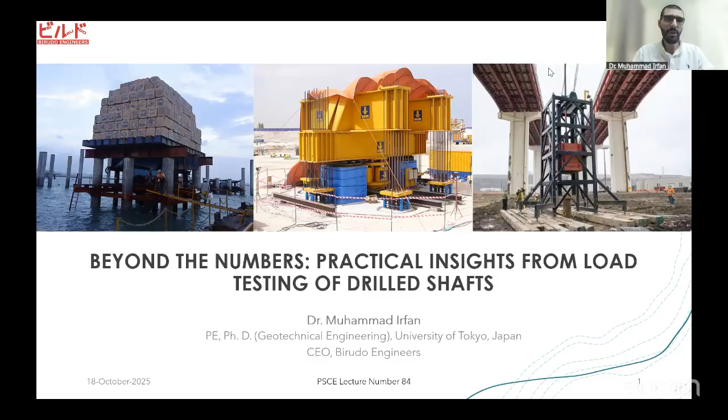I'm gonna continue on. So today's discussion topic is beyond the numbers. It's more on the practical side. There might be a lot of things that we don't find in the textbooks, and there are certain things that we often don't even discuss. So the objective of today's discussion is to look from the hands-on perspective, how the load testing of the drill shaft is to be, what are the pitfalls in that which need to be avoided, and how these can be implemented for the estimation of the pile performance in a better way.

Just to set some context, this is the third lecture in the series which I've been honored to be invited by PSCE for the third consecutive year. In 2023, when we started, we talked more on the design and construction of the pile side. Then last year, we talked more on the load and integrity testing of the pile. That was more generic in nature, where we discussed different kinds of load testing and integrity testing, and different techniques.

Based upon a lot of questions that we got from last year's lecture, I realized there is a lot of interest in the engineering community about load testing, particularly the static load testing of bored piles. That's quite common in Pakistan as well, and even if we talk about the Middle East and other industries, bored piles are mostly the common technique adopted. So that's why I decided to focus this time more on the load testing, and more precisely on the static load testing of the drilled shaft. That's going to be the focus, building on the previous discussions we've had over the years.

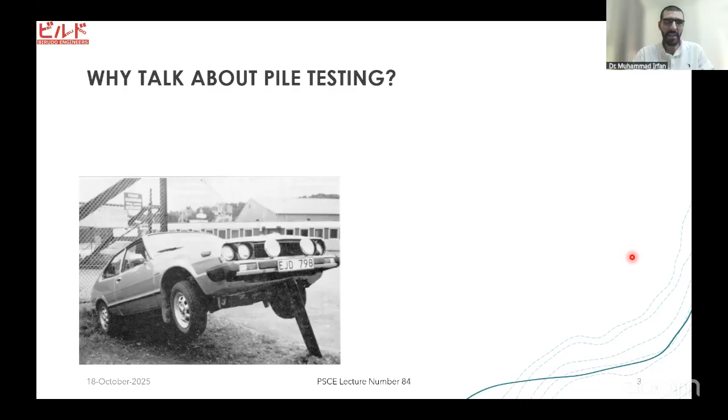Now, the first question is why it's even important to talk about pile testing. This picture that you see in front of you, just try and make a guess what would have led to this kind of situation. Some of you might think that the driver might have been quite careless in his approach, and he would have just driven something on top of some pole extending from the ground, or some movable things underneath. But you can make all your guesses, probably this is the last thing you would have expected, as I can show you in the next picture.

So what actually happened was it was a driven pile which was being driven on the opposite side of the road. And this pile underneath it bent and bent, and there was a car in the parking lot on the other side, and it just lifted it up. Now that's the nature of the problem that we are dealing with.

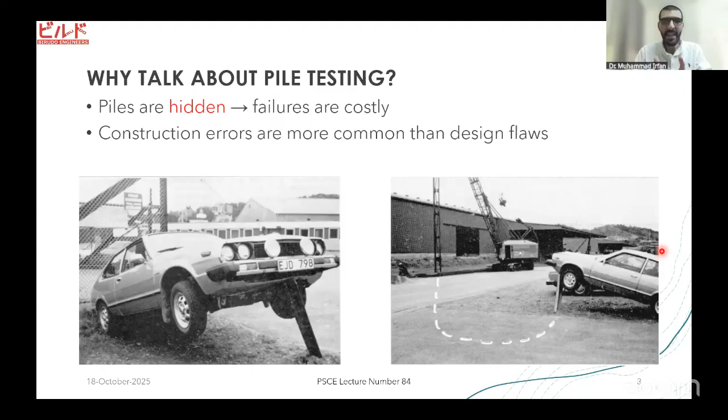Piles are hidden structures, and their failures can be very costly. So if there are any construction errors, it's important to understand that more often than not, it's construction errors which are there, and less common are the design errors. Design errors are generally less frequent than construction errors, because of examples like this that I've shown. And you can see there are a variety of construction problems that you can find in case of piles. Just see all these pictures - maybe if you have this kind of defect at a shallow depth, probably an easier solution is that you excavate around it and fix it. But you can imagine if this kind of thing happens deep into the pile, it's very difficult, or rather pretty impossible, to actually fix it.

So this is where pile testing comes in. This is where pile testing can be of help for us. Testing shows us that both the quality of construction is up to the mark, and it also enables us to validate the design assumption. So that's the challenge, and that's the benefit that the testing gives us.

Now, what is our ultimate goal? Our ultimate goal is to have good pile performance. And what testing does is provide us with a feedback loop between the design and the execution.

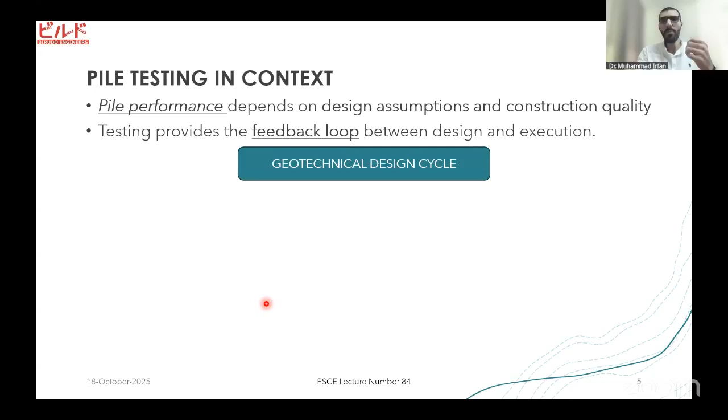To better understand this, let's look at the geotechnical design cycle. We start with geotechnical investigations, where our main goal is just two things: we want to determine the lithology, and we want to determine the strength of the soil.

Once we have done geotechnical investigations and determined these two things, based upon the lithology and soil strength parameters we establish, we design the pile. Designing the pile means establishing the pile diameter, the length of the pile, the center-to-center spacing, the group efficiency factors, and things of that sort.

So we design the pile like that, and then the next step in the geotechnical design cycle, because these piles are supposed to support very important structures, is that you have to verify your design assumptions. You have to validate your design. For that, the codes and standards suggest that you cast an index pile or a test pile, and you load that pile with real world conditions on top of it, loading it 2 to 3 times the design load to see how it behaves.

That's the objective, because we ultimately want to validate the performance. The behavior or performance of the pile, since it's going to be a very important component of the structure, needs to be validated.

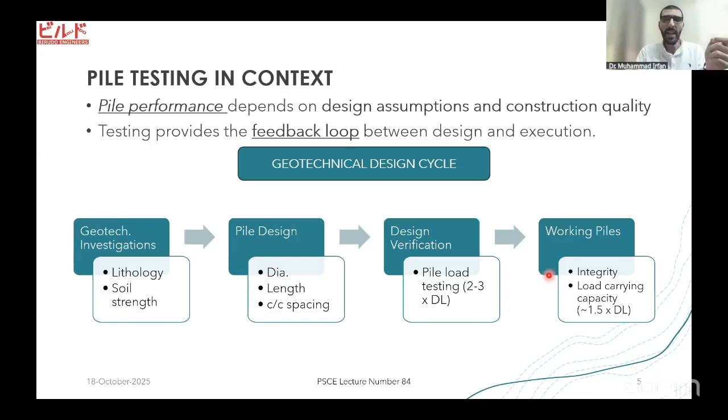And what this kind of testing helps you do is pretty much close the feedback loop. So you see, these two are pretty much the design phase things - the geotechnical investigations and the pile design. Then this is the pre-construction stage, and ultimately this is the construction stage.

This is a very important and critical stage that we call the pre-construction stage. Sometimes it gets mixed with the construction stage because of the short time span you would have. But our today's focus is mainly going to be about this pre-construction phase, the pile testing done for design verification. That's going to be the main goal of our talk today.

Once you have done all that, testing on the working pile pretty much closes the performance feedback. It provides feedback that, okay, you made all these assumptions, and after making them, you validated these assumptions like this. From these assumptions, you ultimately completed your construction. Is this construction according to the design assumptions or not? That's what this feedback loop tells you.

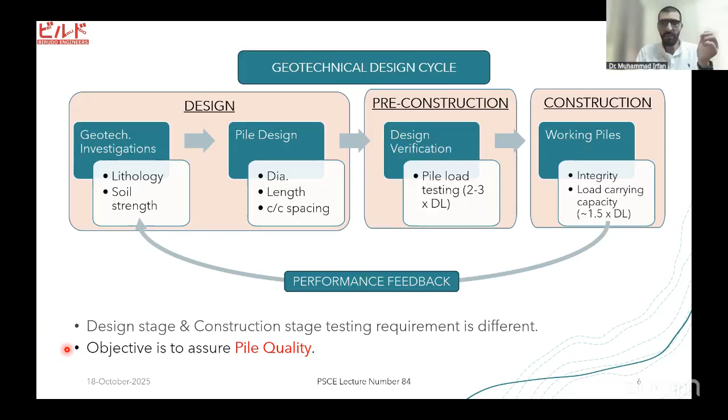In this stage, yes, load testing is just a verification of the design assumptions, but at the same time, you need to check whether the integrity of all the constructed members, that is the piles, is appropriate or not. By doing all this, our ultimate objective is to assure the quality of the pile, whether it's good or not. So now let's see what we mean by pile quality.

Now, talking about pile quality, if we are to assure the quality of the pile, there are two questions we need to answer. Our concern is to assure the quality of the pile. We need to see what we need to check, and the second question is how to check that.

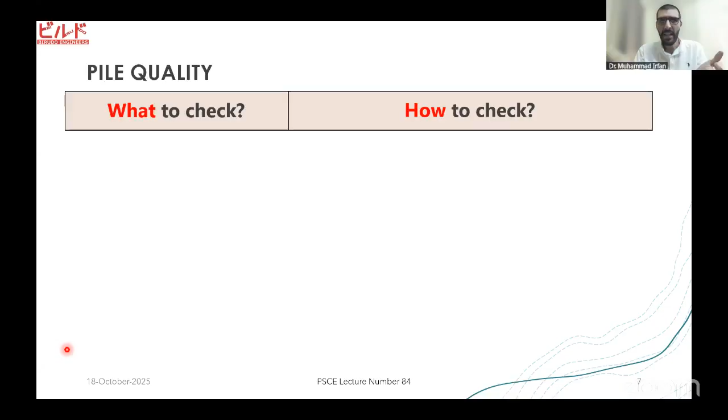To answer the first question, what we need to check is basically two things. One, as I already mentioned, is the integrity of the pile, and the second is the load carrying capacity. If you confirm these two things, you've pretty much answered whether the quality of the pile is good or not, because that's the question we engineers are required to answer. So by answering whether the pile integrity is okay and whether the load carrying capacity is okay, we can answer this question.

Now talking about integrity, it means whether the pile length is appropriate, whether the cross-sectional area is okay, whether there are any cold joints or other cracks within the pile, or any segregation of concrete. So that's what we mean by pile integrity.

Now, how do we check it? In order to check it, there are different methods used. Some of them are listed here, just some of them. As I mentioned earlier, I've discussed them in more detail in last year's talk, so I'll not touch upon those today.

So today, for the load carrying capacity, we can perform the static pile load testing, the high strain dynamic pile load testing, and there is bidirectional testing. There are some other techniques like statnamic and others, but I'm not going to go much into detail today. So our today's focus is going to be on these two topics mainly.

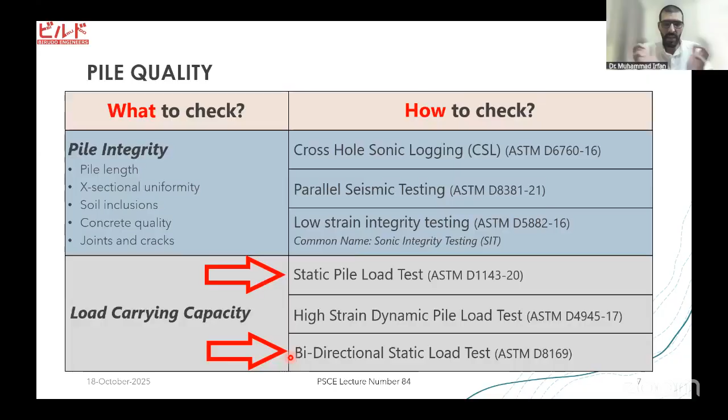First is the static pile load testing, which I'm going to look more deeply into from the practical aspect. And this is a very new and innovative technique - I'm sure people working in the Middle Eastern industry would already be aware of it, but it's not common in the Pakistani construction industry. So I'm just going to give an overview of this bidirectional pile load testing.

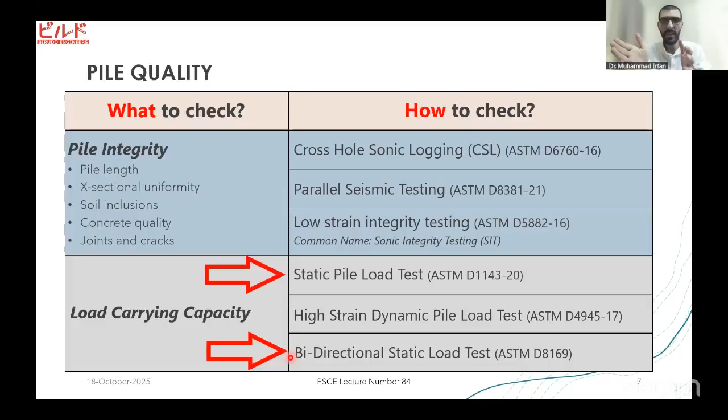So what I'll do, with Tahir Saab's permission, is I've tried to structure the talk by dividing it into two parts. The first half I'm going to cover in an hour or so, then we can have a break and answer the questions you'd have in this first half, and then move on to the second half. So going forward, let's talk about the pile load testing.

So just to give you a quick overview of what a static pile load test is, this is how the assembly looks. You place a hydraulic jack between the pile and a heavy reaction load at the top. When the jack tries to expand, because of this heavy load at the top, the jack cannot go up, and as a reaction, the load comes down on the pile. So that's how you are able to put load on the pile. Although I've talked about this reaction assembly with big concrete blocks or soils on top of the pile, there are many other types as well, which we'll talk more about in this lecture.

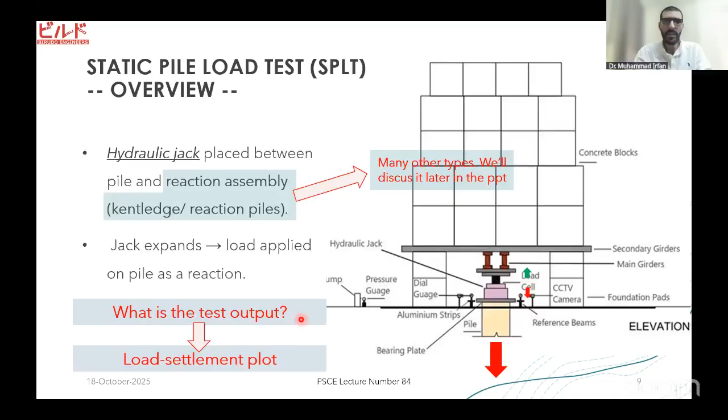So we've performed the test, and once we've performed it, the question is, what's the test output? The output is a single graph we are generally aware of, called a load settlement plot. This is how typically a load settlement plot looks. After performing that static pile load test, all our discussion is focused generally on this load settlement plot.

So as we started, our ultimate goal is to have good quality understanding of pile performance. Since this test is a very important component, if we are to perform a high quality pile load test, what are the things we need to measure very precisely, very accurately, to be able to say that the quality of the test was very good? And because the quality of the test was very good, we are very confident of the pile behavior that we understand.

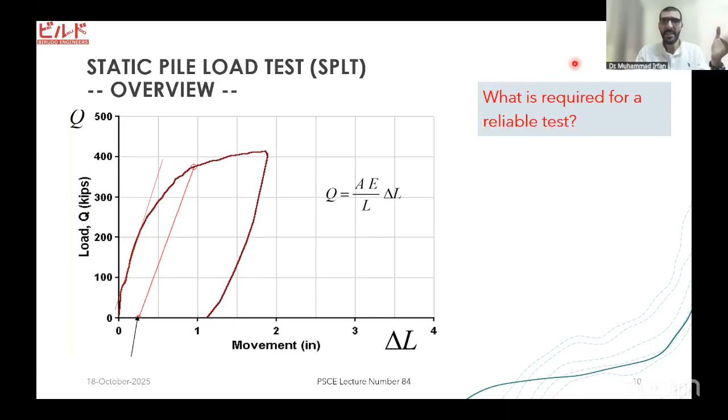So the question is, if we are to have a reliable test, what are the things that are required? You would see from this graph that there are only two things we are concerned about. We're only concerned about the settlement, because this graph only has settlement on the x-axis, and the other thing is the applied load. Only if we measure these two things, head settlement and applied load, very accurately and precisely, are we able to get a high quality test.

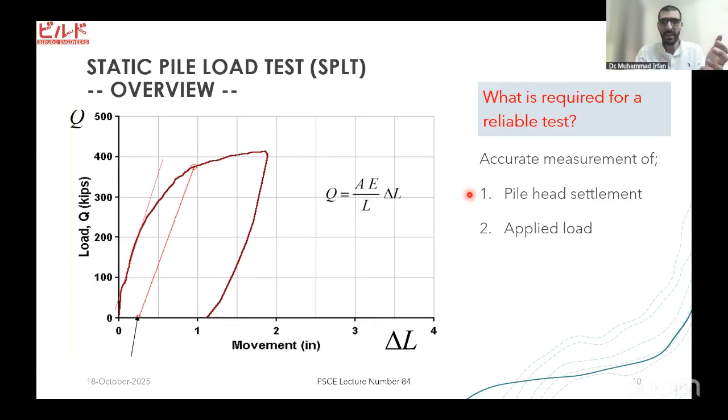But it's easier said than done. So in the next slide, I'm going to show you examples and problems from the practical angle, which can occur in the determination of a high quality pile head settlement and also the applied load. So what are the biases?

Dr. Irfan? Little interruption. I just want to inform you that a lady from China, who manufactures O-cells, has also joined us and is listening. Thank you very much, Shia, for joining. Please go ahead, Dr. Saab. Hi, hello everyone, thank you for letting me join this meeting. Hello, thank you Shia, we have heard you. Let Doctor continue, and later after the lecture maybe we can have a little chat. Yeah, sure.

Okay, so what are the biases in the pile settlement measurement? How do we measure the pile settlement? Basically, there are reference beams that we put in, and we put gauges on top of it. That's how we measure the pile settlement, the head settlement. So what biases can be there?

There can be unstable supports of these reference beams. The end supports can be a little unstable, and because of the movement of those reference beams, the ultimately obtained settlement values would not be so accurate. At the same time, there can be environmental effects, because of which, as the ASTM standard suggests, it's generally covered to protect it from environmental factors. So these are some of the common problems.

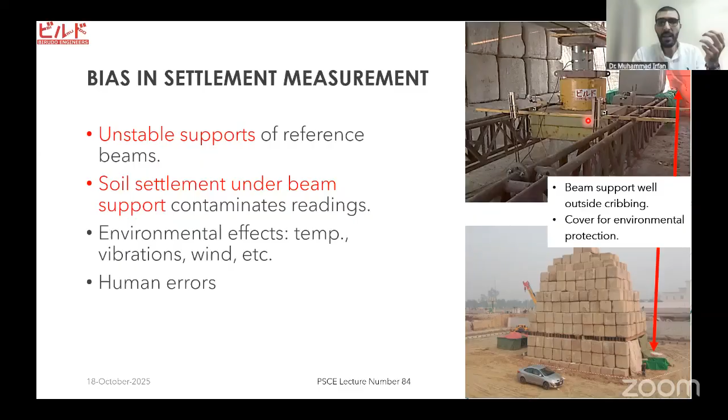Also, what happens is that in the kentledge arrangement, generally speaking, the space is very congested, and because of that it's often very difficult for people to actually go in and take readings from these dial gauges. One way is digital data acquisition, but that's not very common locally. Another way is to just put CCTV cameras there and get the reading, if you don't have digital sensors, although digital sensors are something that should be encouraged.

Also, human errors can cause a lot of problems, because these dial gauges are so small, and sometimes because of wind and other factors it's difficult to read them. Sometimes dust goes on the surface and it's difficult to read the readings. Sometimes someone going inside just to take the reading may touch the reference beam, and all the readings get damaged. So all these kinds of biases can occur in settlement measurement.

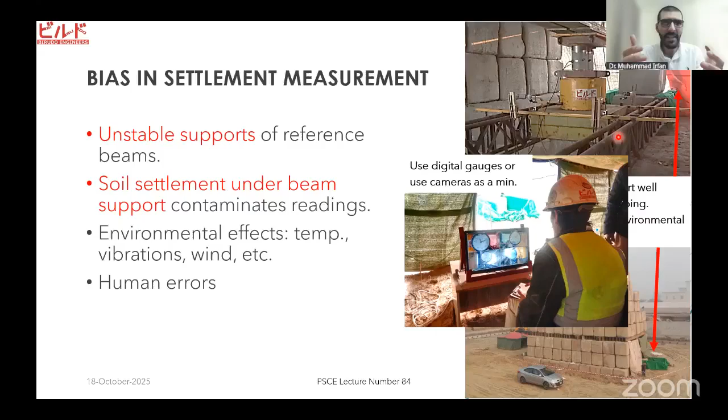But these are the easier things to deal with, that's why I mentioned settlement measurement first. The more critical thing that most of the time we don't focus on is the load measurement. So let's look at how we measure the load in the pile.

There are two components we can generally talk about. One is the hydraulic jack. How it works is that there is a pump containing hydraulic oil, which is pumped into this cylinder. This cylinder tries to expand, and that goes back. This is how you apply load on the pile. So that's what a hydraulic jack is.

But what's important to understand is that the load cell is the load measurement device. Although we often use the hydraulic jack for load measurement as well, that is not encouraged, and I'll show you in the next slide why and what problems are there. So to clarify, the hydraulic jack is generally a load application device, and load cells are the load measurement devices which are commonly used.

Now, in order to understand this confusion more in a better way, let's look at the ASTM standard for the static pile load test and how it has evolved over the years. If we look deeply, we'll realize that the first ASTM standard was published back in 1981.

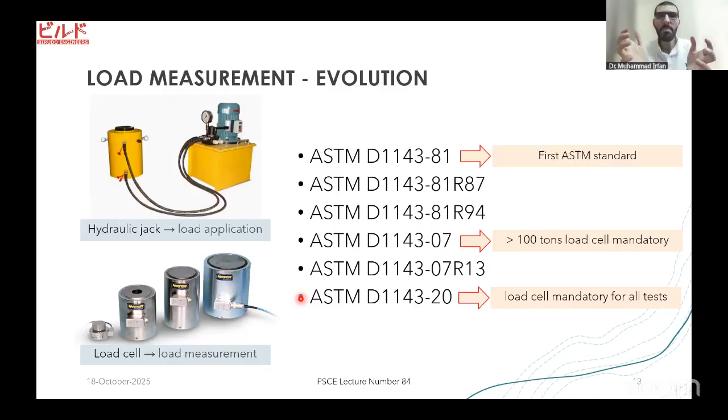Now, why has this been made mandatory and what are the benefits of doing this? That's something we'll look at more in depth.

The problem with simply using the hydraulic system is that there are always some hydraulic system losses. There are friction losses in the fittings, and also there are calibration errors that are always there. And what happens is that even when we calibrate those jacks, in a lab environment, this is a controlled environment where we calibrate those jacks.

But when we put them into practice in the field, there is always some eccentricity of the kentledge that is there. And because of that eccentricity of the kentledge, the calibration done in the lab and the actual performance in the field always differ. I'll show you more practical examples with some data in the next slide.

So because of this eccentricity that is there in the lab versus the practical field, the results of the load measured through the hydraulic jack and the load cell often differ.

Another thing is that the pressure gauge you use has to be very reliable. The least we can do, and that's a common problem in the Pakistani construction industry that we often ignore, is about the kind of pressure gauges we use. At least what we can do is use digital pressure gauges. Why? Because a lot of times, although this hydraulic jack assembly is properly calibrated, people fudge with these pressure gauges to change the value of the load.

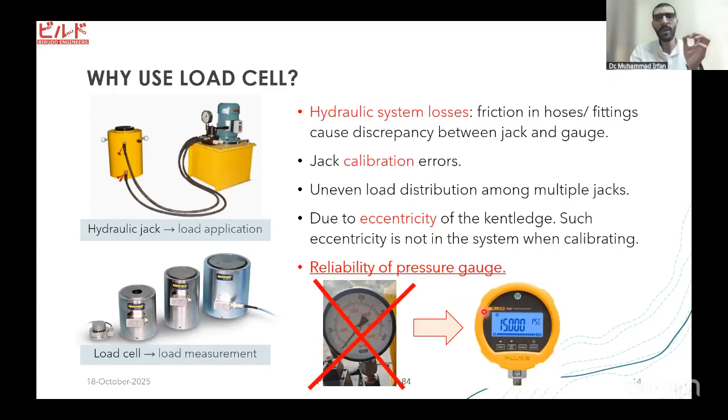So if you are on the consultant side or the client side, having a load test done for your project, the least you can do is have this manual pressure gauge replaced with a digital pressure gauge. I think that's the bare minimum change we can make in the local industry.

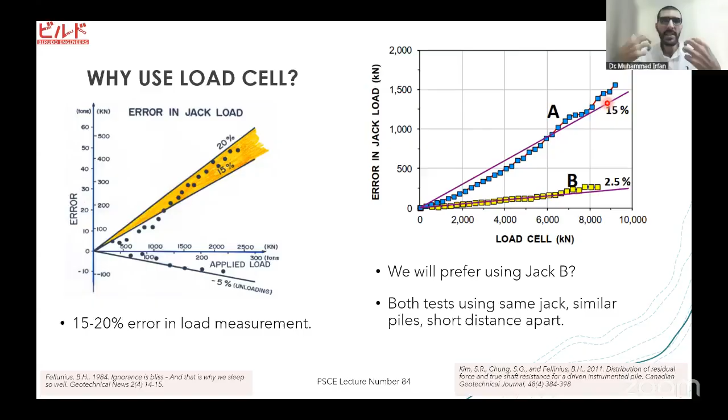So that actually highlights why always using a load cell is important. It's not only because it's an ASTM recommendation; we need to understand why, and what problems can occur if we don't use the load cell.

So then comes some local problems. Although I'm advocating the use of the load cell, there are some practical problems in the local industry. The load cells we use are commonly of, say, 1,000 tons capacity, but if you talk about the whole country, you would rarely find a calibration facility able to calibrate in excess of maybe 150 to 200 tons.

You would go to maybe NED in Karachi, you'd probably find 500 tons capacity, but it's sometimes not working. So the problem is, if there is no calibration facility which can actually calibrate up to say 1,000 tons, how do you resolve this problem?

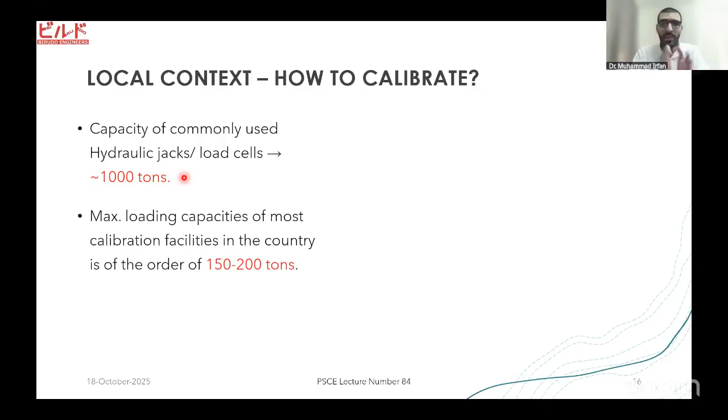But with all these things, it is important to understand that ASTM suggests calibration every 6 months, unless otherwise specified. That's the underlying part which we often miss and do not realize in our industry. So there are some practical constraints that are there.

We need to realize that if our load cell is properly calibrated, and has just been used maybe once in the last 6 months, and has not been impacted by any jerks or impacts, and was stored in a clean, controlled environment, then after say the 7th month, if the same load cell is to be used, it probably will be advisable. ASTM just gives you that relaxation, that you can have some tolerance in that.

So I think we need to be more practical, because when you talk about the projects being implemented, these kinds of little things are often ignored. We need to understand the practical realities of our industry as well, in my opinion.

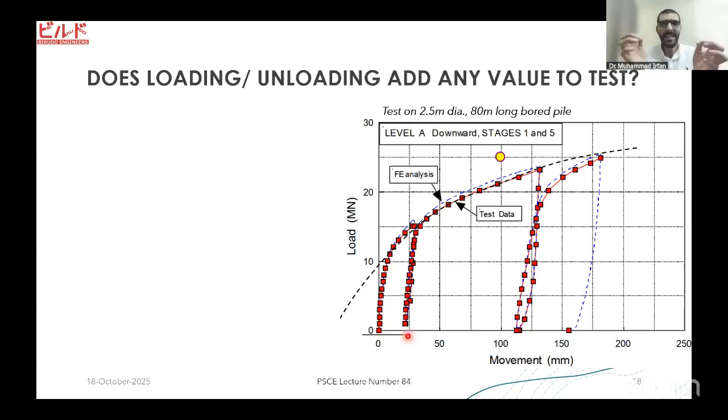If you dig deep, you'll realize the origins of these loading and unloading cycles date back a long time. In the early days, it was thought that these loading and unloading cycles show load distribution in the pile. But more precisely, in previous times, the definition of capacity used was the load taken at 0.25 inch of net settlement after unloading. So you would just unload, and whatever unload cycle at which this net settlement equals 0.25 inch, that load would be your capacity of the pile. That's the definition that used to be there several decades ago.

Although our design standards and codes have evolved beyond that, and today this kind of definition of pile capacity does not exist, still, many times we go for these loading and unloading cycles, which have absolutely no practical significance, in my opinion.

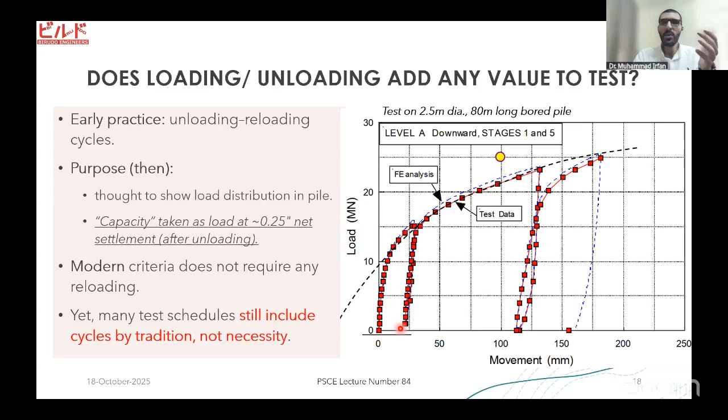Some people might say it gives you an idea about the creep load, but then you'd ask more questions. How does it help you in creep load? No one has an answer to that.

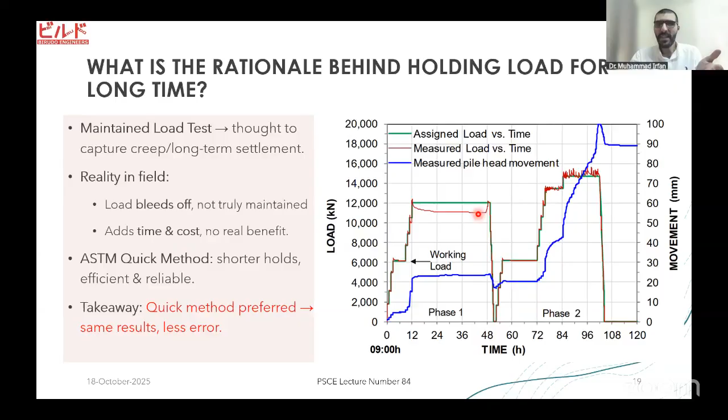In fact, the recent ASTM standard has made this much easier. It specifies that the quick method is now the standard method. Instead of maintaining the load for a long duration of time, it's better to apply smaller load increments, hold them for a shorter duration, and then move to the next one, holding each for the same shorter duration. That's what the current ASTM standard suggests. This shows that holding the load for a long duration does not add real value to the test. To emphasize this more, look at another example.

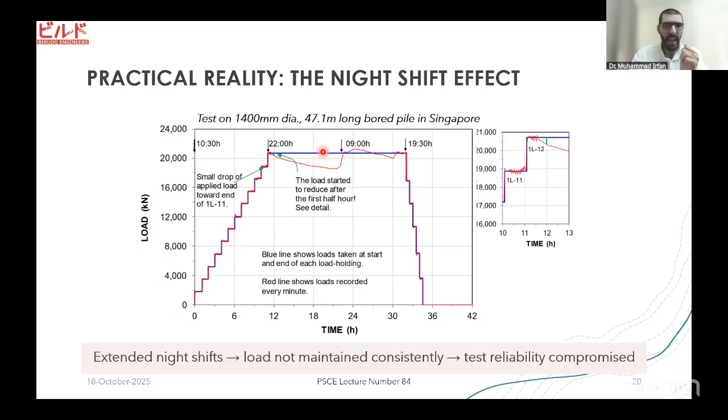But even if you have to apply the load for a longer duration of time, what's the way to do that? There are systems available internationally, although not common in Pakistan, that can assure automatic load application. If the load starts dropping, the system kicks in and turns the pump on automatically, increasing the pressure and maintaining it. That's something that can be done.

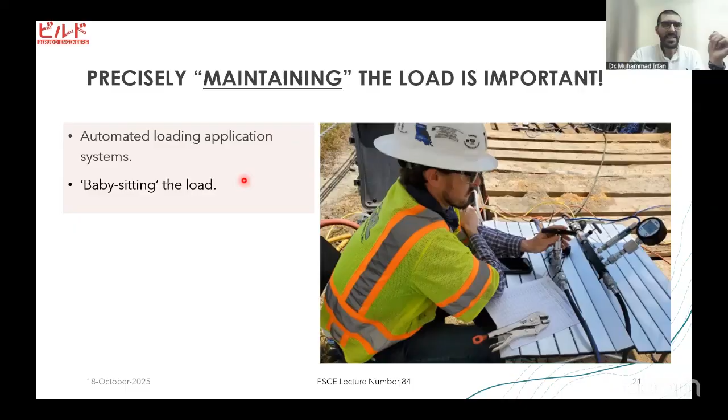Or the other way is that you can babysit the load, as you can see here. There's a digital pressure gauge where the engineer can notice the load, and another digital pressure gauge connected to the system for automatic data logging. You are actually controlling and babysitting the load and managing it. But a better way, if you're not able to do that, is to get an automatic load application system, and that will solve all your problems.

We talked about the reaction assembly, and I said I'd talk more about the different kinds of reaction assemblies that we have. We only know about this Kentledge type reaction assembly, where we either put concrete blocks on top or sometimes sandbags, but it has its own challenges.

Another challenge is that the maximum load you can apply is limited. For example, this Kentledge is for around 1,400 tons of load. The biggest I have seen internationally would probably be 4,000 tons. So the maximum test load is limited, and that restricts the designer as well. If he wants to economize the system, or if the strata is competent, he cannot design a pile that can carry maybe 7,000 tons of load, because he knows it will not be possible to actually test it. It also requires a lot of space, and strong foundations are required as well. So all these problems are there with the Kentledge assembly.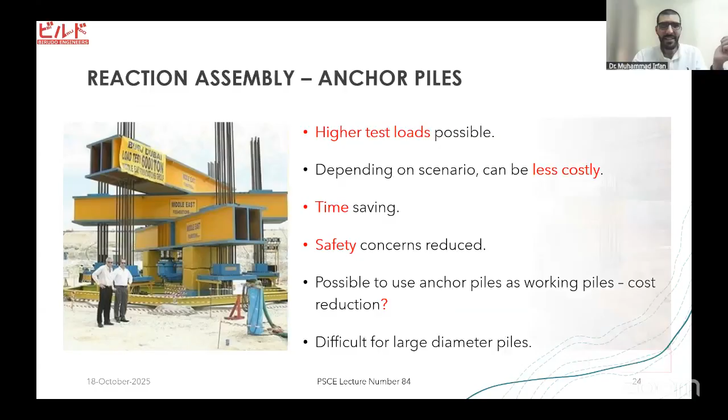This kind of assembly becomes a little difficult as the diameter of the pile keeps increasing, but it still solves a lot of problems. It's actually more safe and more time-saving, and sometimes more economical as well. This is just a practical example that this is not only something that can be done worldwide. For example, a 2,000-ton pile load test that we were able to do recently in Pakistan. So that's something possible even with the current resources in the current environment.

Another option is to go for a crown anchor assembly. That's also something of a lot of benefit. There's a crown type arrangement that is put on top of the pile. Hydraulic jacks are placed here, and then you have the anchors surrounding it. That's how the jack tries to expand, and the anchors provide the required tension to make the system stable.

This is fairly good for congested spaces and quite time-saving as well. But there are challenges. The maximum test load is limited to a certain limit, depending on the capacity of the crown and also the surrounding soil. It has to be competent enough to provide enough tension to the ground anchors. But this is also a possibility that can be utilized.

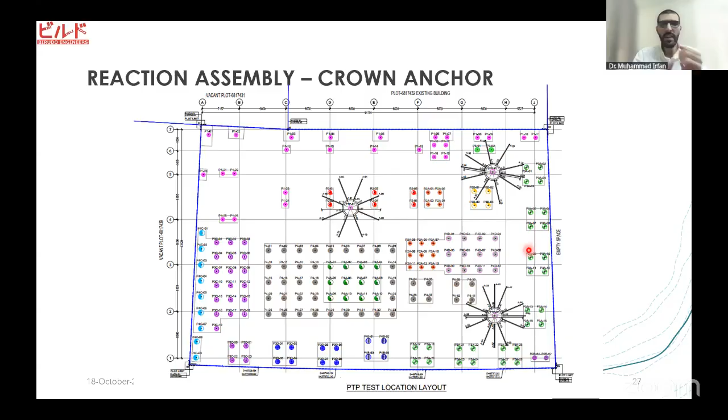You can see if you want to test the working piles using the crown anchor arrangement. This is a congested working pile arrangement where you have all the working piles, and these tests use the crown anchors done in the same environment. So even in congested spaces, this crown anchor arrangement can provide a lot of benefits.

So you've done the test now. We have seen the different possibilities of performing the test. Now, how do we interpret the results? As we already discussed, we get the load settlement curve. But for example, you have two graphs, one having a large movement, one having a small movement, both showing almost the same kind of load. How would you determine the capacity? That's actually the more tricky part. The common answer you'd get is that there are many interpretation methods we can apply.

But before going into that, let's look at what capacity means when we talk about capacity in civil design. Looking at civil engineering design, capacity means the load at which the material fails. We very commonly understand the capacity of steel bars as the load at which they fail. Similarly, for the compression test of concrete cylinders, that's the load at which the cylinder fails. So it's very easy to establish the capacity of a steel bar or a concrete cylinder.

But how do we define failure in the case of piles? As we said, it's easy to define failure in case of steel or concrete, but how do we define failure in the case of piles? In case of piles, that's probably how we define the failure.

You perform the load test and get the load settlement curve. Wherever you see the pile starts plunging, you would call that the failure load, because this is the load at which the pile starts to settle down without taking any further load. So that's something you would call the failure point.

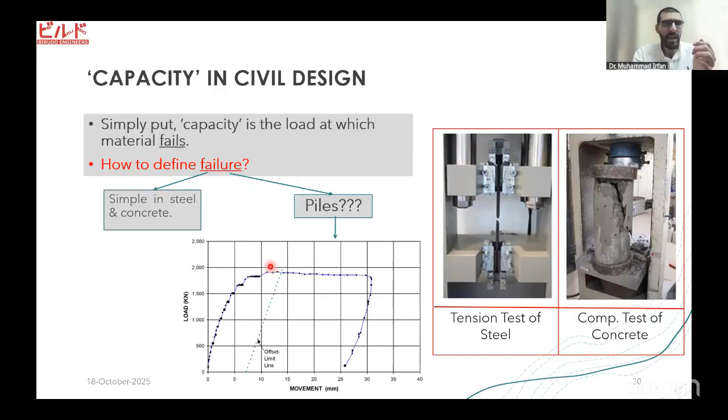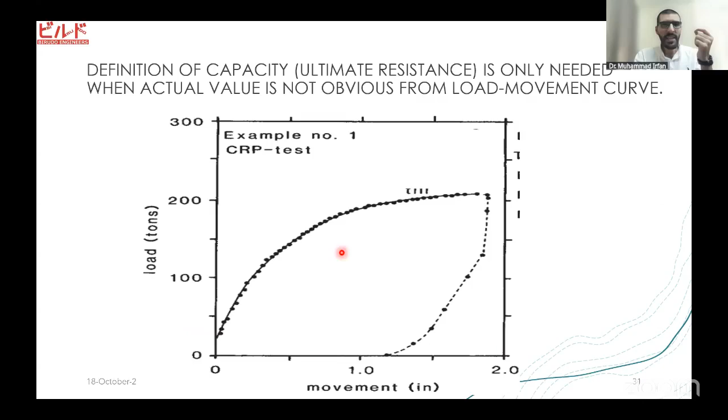So it's easy, but that's not practically the case, because this kind of load settlement graph is a rarity. You'd not always find this kind of load settlement graph. What is more common is probably a graph like this, where you are increasing the load and you have the movement, but there is no distinct plunging. So if you're not seeing any distinct plunging, how do you determine the capacity?

There are methods that many people are already aware of. You apply the Davisson's offset limit method, which is very commonly used. You apply the initial tangent, draw an offset to it, and where this offset cuts the load settlement curve, you call this the pile capacity.

But is this the only method you use? No, there are many other methods to determine the capacity. I've written just the names of some of those methods. So the next question would be, okay, there are so many different methods, but the capacity determined from all these methods must be similar, so it does not make any difference which method you use - you'll ultimately end up with a reliable value of the pile capacity. That's how we generally would think.

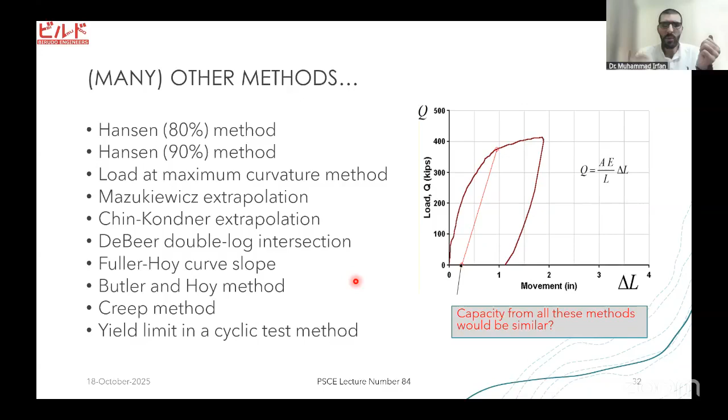But that's not the case practically. For example, in this graph, the pile capacity determined using Davisson's method is 181 tons, and it goes as high as 235 tons if you apply the Chin's approach, with all this scatter there. Now, it is important to understand that for a pile having an overall capacity of say 200 tons, there is a scatter of almost more than 50 tons, meaning there is a possibility of scatter of around 25% between any two people determining the capacity. So it is such a large scatter. We are talking about precise numbers, and if there is a difference of opinion of 25%, it's a large number in any kind of design.

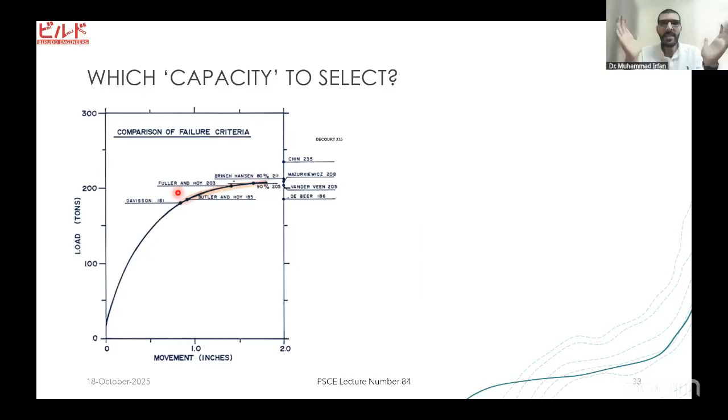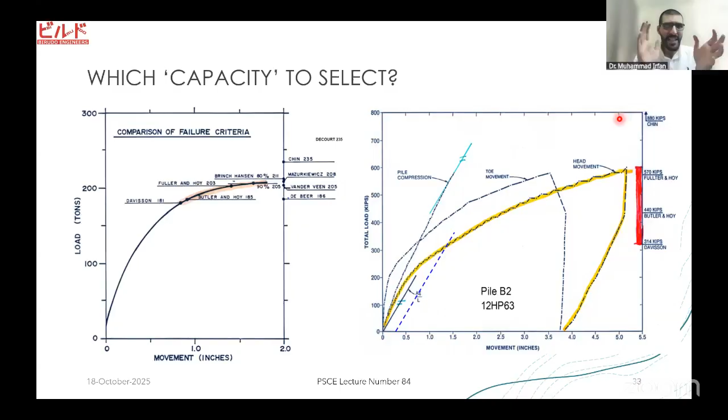And this is not a one-off example. You'd find many other examples. For the second example, in this load settlement curve, Davisson gives a capacity of probably 314 kips, and you can go up to 570 kips using the Fuller and Hoy method. If you go for the Chin method, that's in excess of 880 - almost double the Davisson value, and Chin is maybe almost 3 times that. So selection of capacity is again a very tricky subject.

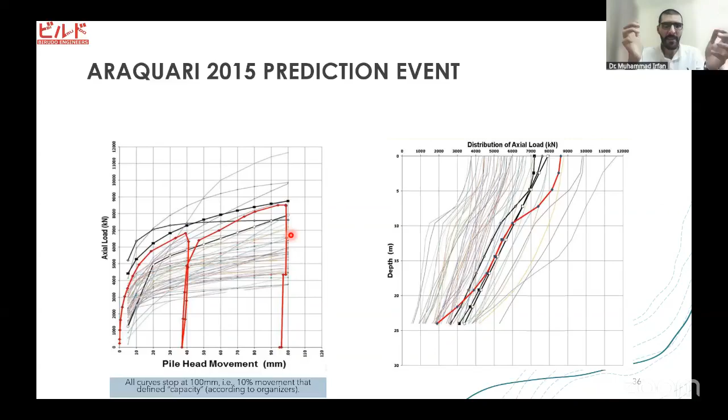So it's very difficult to have a good understanding, and there's a huge scatter that exists even worldwide in understanding the pile behavior. And that's not only in the load settlement curve.

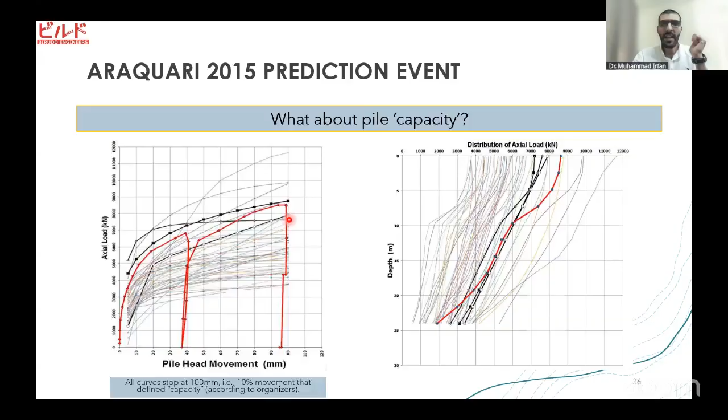Even when we talk about pile capacity, once they performed the test, they got this red line, the actual load settlement response of the pile, and they gave this to the participants and asked a follow-up question: what is your estimation of the pile capacity? Again there was a huge scatter of responses. Some participants thought the pile capacity should be around 6,000 kilonewtons, while a large number suggested a capacity in excess of 8,000. So you can see there is a lack of understanding or coherence on the understanding of pile capacity as well.

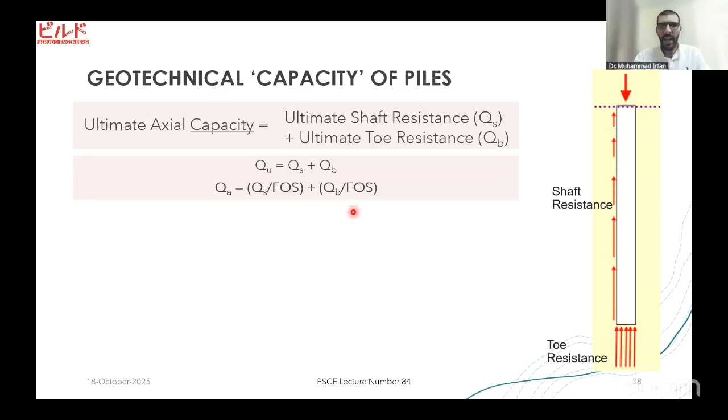So very quickly, let's talk about the geotechnical capacity of piles. When we talk about the capacity of piles, it is composed of two components: the ultimate shaft resistance and the tip resistance. The shaft resistance is derived by the shaft, the toe resistance by the toe. What we generally do in normal design practice is apply certain factors of safety on the shaft and the toe, and whatever the answer is, we call it the allowable load - the load at which we can allow.

The important point I want to make is that when we are predicting the capacity of the pile, we determine the shaft resistance and the toe resistance separately. But when we are validating the behavior, when we perform the pile test, we get a single load settlement response. In this single response, there is no way to separate the shaft resistance and toe resistance from this graph reliably.

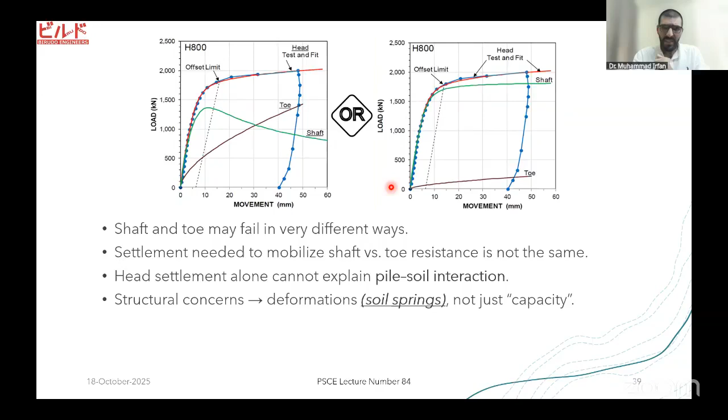The point I'm trying to make is that the head load settlement curve does not provide the full picture. So what we can do is put some sensors or instruments in the pile, and by doing that we can actually separate these two out and get a better understanding of the pile behavior. And only with a better understanding of the pile behavior can we design more economical and more safe pile foundation systems.

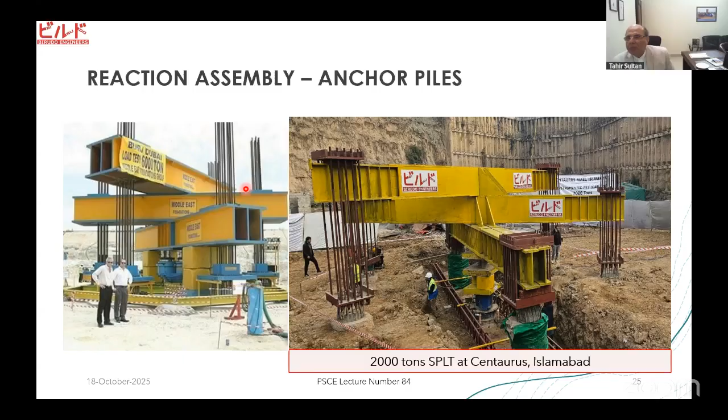Well, I don't see any other question, but for my curiosity, I just wanted to ask and discuss with you one side point. When we are doing the pile load test, whether in tension or compression, what do you think about the ASTM codes or British codes which suggest that the distance between the supporting beam should be 5 times the diameter of the pile, and some suggest 3 times the diameter? Do you want to comment on it?

Yeah, I think it's a very interesting and practical point. To be honest, my understanding is that the ASTM or British standard suggests maximum thresholds, because they have to generalize things to fit the context that can be applied in the entire world. My question would be, what soils are we talking about? If soft ground conditions, maybe soft clays, in that case I might personally be interested to even increase the spacing to 6 times the diameter. But if we are talking about rather stable grounds, I might be okay decreasing that distance. What I would probably do is run some FEM to see the behavior, how much the lateral spread of stress would be in this strata, and accordingly decide.

But from the Pakistani context, one may argue that in the same project, while following the AASHTO guidelines, there would be a group efficiency factor of 1 for a 4 times diameter center-to-center spacing. For the same project, when we talk about reaction piles, someone may ask that ASTM suggests 5 times clear spacing, not even center-to-center spacing. ASTM asks 5 times clear spacing. So there is a mismatch, in my opinion. I personally think we have to look at things from a more practical angle, and in more stable soils, you should be able to reduce the spacing.

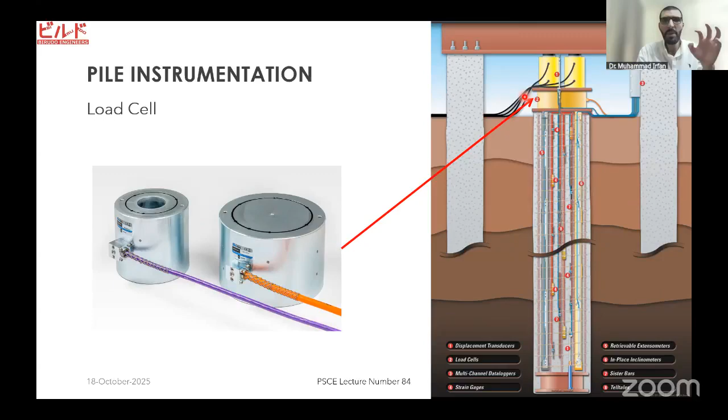So how do you do instrumentation, and what's the benefit of it? I'm just going to make it very easy and simple, trying to give some basics and fundamentals. The first instrument we use is the load cell, and we have talked a lot about it already. We put some load cells at the top so that all the load is digitally measured and fed into a system. That's the load cell we use.

We use extensometers in the pile. These extensometers are strategically placed within the pile, and what they do is measure the settlement or movement of the pile at the locations where they are installed. Previously we were only measuring the head settlement, but if we install this kind of telltale extensometer at the mid depth or at the toe, we will be able to see the movements at the mid depth and at the toe as well.

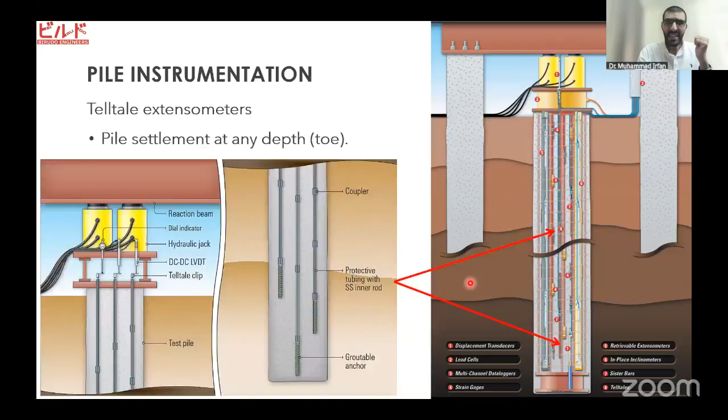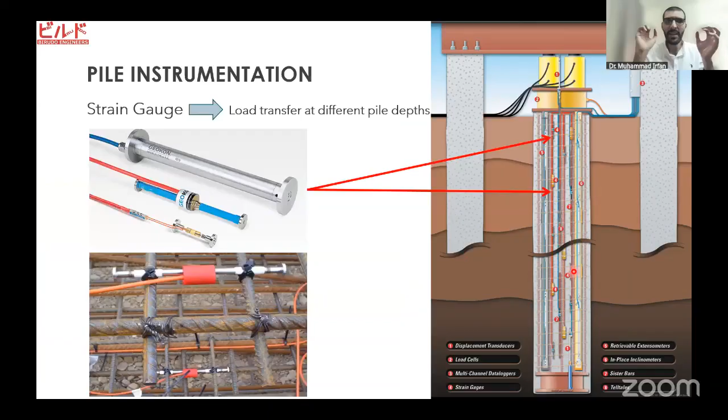Then finally, we have the strain gauges, located at different depths within the pile. What they do is give you the strains inside the pile, and if you know the strain, you are able to convert this strain into the load using mathematical expressions. There is quite a lot of complication to it, but I'm not going into that detail, just keeping it very simple and basic. So that's how you install the strain gauges. Whatever location where you have applied them, they start giving you the response at those locations.

What I mean is you can get the spring stiffness at those locations. Those from the structural side would have a better idea, because this is how they actually model their piles in structural design software. This is the key thing they look at - the Winkler spring stiffnesses. Generally speaking, we geotechnical engineers provide those spring stiffnesses based upon empirical methods.

If we install these sensors, you're able to get the actual pile response at these locations. You're able to get the actual spring stiffness response at each location, not only along the skin, but also at the toe as well. So that's something you'll get.

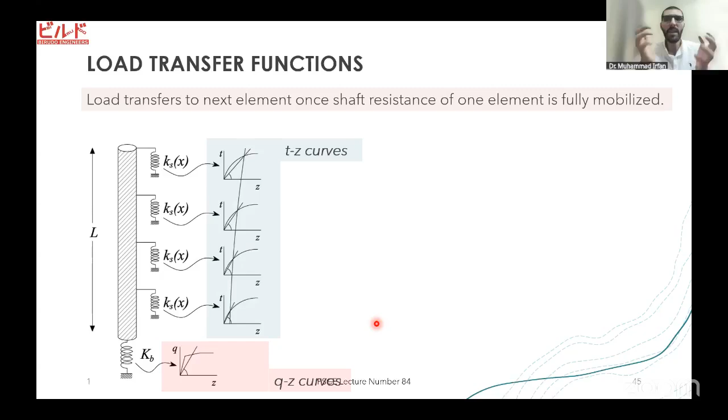These graphs you get along the pile length are what we call TZ curves, and the graphs you get near the toe are what you typically call QZ curves. These TZ and QZ curves are of most interest for structural engineers. From this, you'd get an idea of how we can understand pile behavior in this way, and from these graphs we can ultimately plot the load transfer curves.

What I mean by load transfer curves is that as we apply the load, as we increase the applied load, we're able to see how this load is being transferred at different depths in the pile. Let me give an example: this is the first loading increment, second, third, and the final loading increment.

At the final loading increment, suppose 7,200 tons or kilonewtons of load is applied. These sensors would tell us that out of this 7,200 kilonewtons, probably around 7,000 kilonewtons was transferred to a depth of 4 meters, and probably 6,500 kilonewtons was transferred to a depth of 12 meters. By following the same procedure, we can get a clear idea of how much load was transferred to the toe. That's what you can actually get from this.

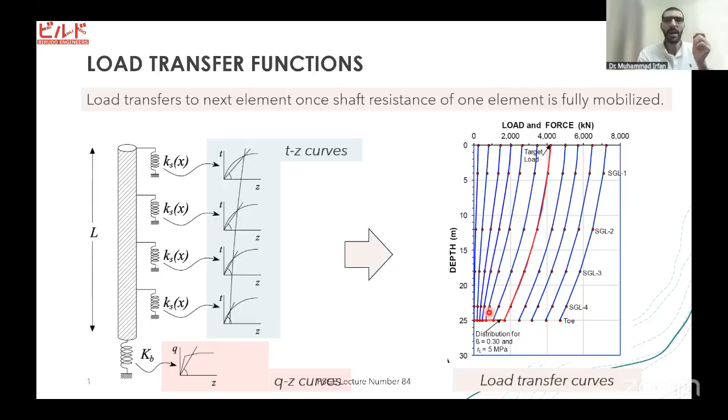It can clearly tell you how much load is being carried by the skin and how much load is being carried by the toe. That's the benefit of this kind of instrumentation.

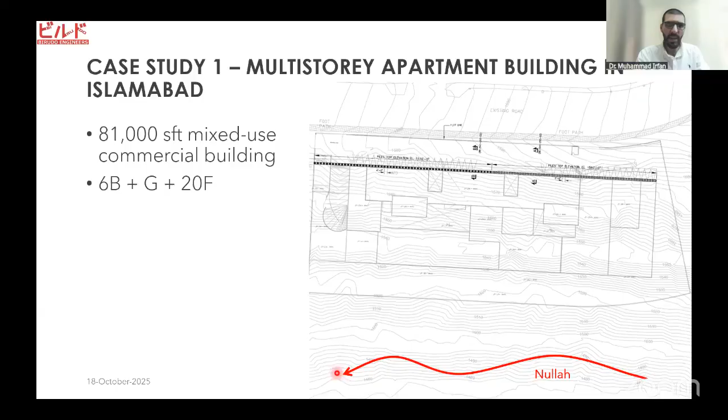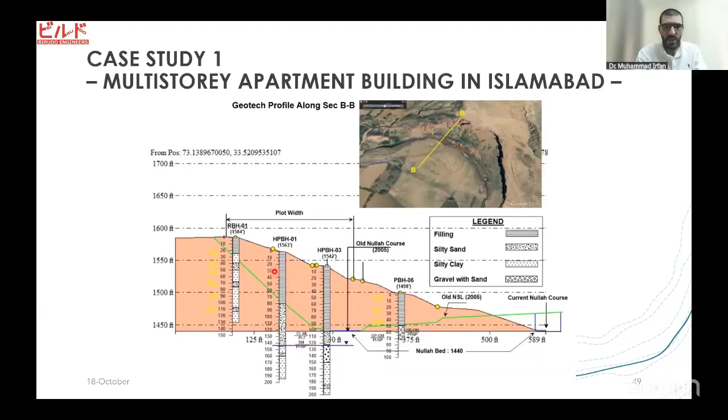Let me give a couple of quick case studies. This is a multi-story apartment building project we did in Islamabad. It was an interesting project - half the site was on fill, half was on cutting. It was on top of a hill, and at the toe of the hill there was an old nullah that used to flow. This gives an idea of the typical cross section, but there is quite a significant thickness of fill available there.

Previously there were two pile load tests to be performed. Test pile A was designed to have an ultimate load carrying capacity of 800 tons; dividing by a factor of safety, the allowable load carrying capacity was 330 tons. Similarly, another pile was planned with a diameter of 0.6 meter and a length of 45 meters. We analyzed the problem ourselves and realized that if our objective is to carry a load of around 300 tons, we could try a 0.6 meter diameter pile with 30 meters of length, and we tested it to 1,000 tons of load.

Now, what's important to understand here is that you need to compare this instrumented pile load test with this test of TPB.

Both piles have the same diameter, same lithology, one having a length of 45 meters, the other having a length of 30 meters. So generally speaking, if this pile has an ultimate load carrying capacity of 650 tons, this other pile should have a capacity much smaller than 650 tons. It should settle much more quickly compared to this pile. So let's look at the next slide to see how the actual instrumented load test behaved.

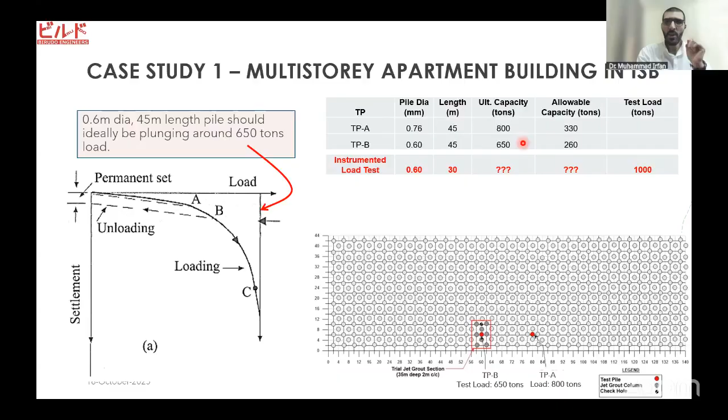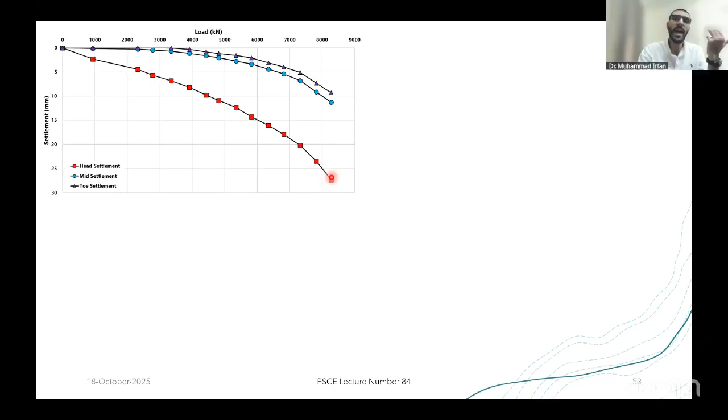It means that the previously assumed pile capacities were significantly smaller than what the actual strength of the soil is. If we had not put in sensors, we would be unable to get an answer to this question. So by putting in sensors, this is able to give us an answer.

And this is the load transfer curve that I was talking about earlier. This tells us that almost negligible or no load was transferred to the pile toe. Almost all the load was carried by the skin. And if you look, there is almost no load transferred to the toe of the pile. Not only this, the majority of the load was taken by the 50-foot length of the pile, and even underneath that, the load transfer was almost negligible.

So this information tells us that maybe if you had not given this additional 30 feet of length, that would have been enough.

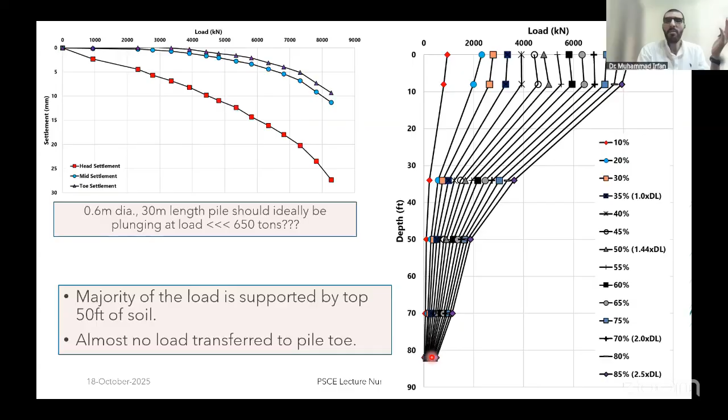Looking at another case history, for example, this is an apartment building project in Karachi. The test pile was around 137 feet, and the actual pile was cast to be around 103 feet.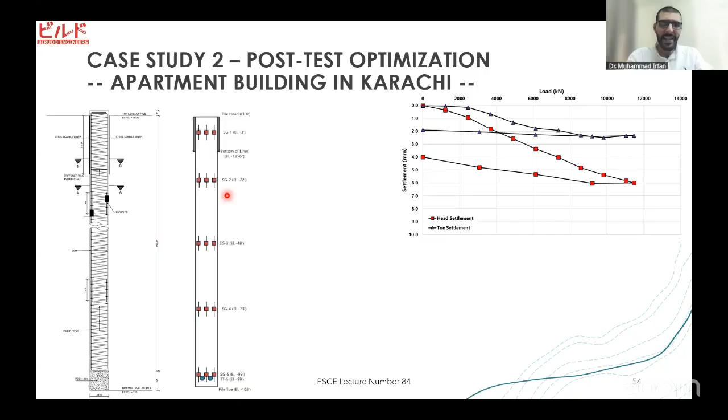You can see this is the response of strain gauge 1, which is at the top, strain gauge number 2, which is here, and as you go down to strain gauge 3, there is a much smaller strain at this level. At strain gauge 4 and 5, probably no load was transferred.

That gives you an idea that all this length is probably redundant, and you can actually avoid providing this length because no load was transferred to this depth. This is visible again from the load transfer curve as well. You look at the load transfer curve and you see that at strain gauge levels 4 and 5, almost no load was transferred.

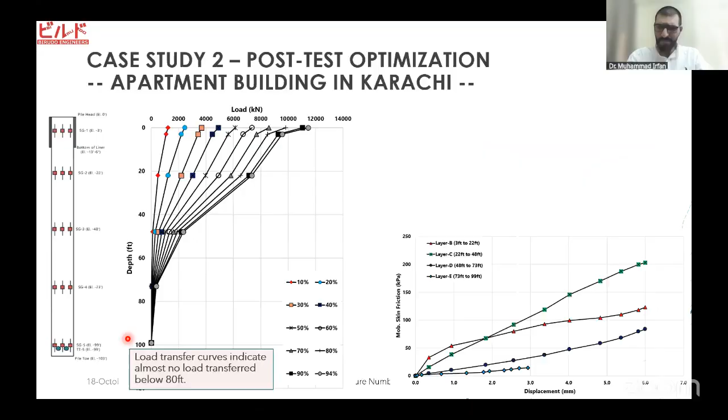So what we did was, we plotted this kind of graph. This is the mobilized skin friction versus displacement. And if you divide it into different layers, these are the actual skin friction values that were mobilized in the pile.

Now, this is important to understand, because previously when you are designing it as a designer, these are the numbers of unit skin friction that we determine by applying any of the theories mentioned in the literature, whether it be the alpha method, beta method, or any other approach.

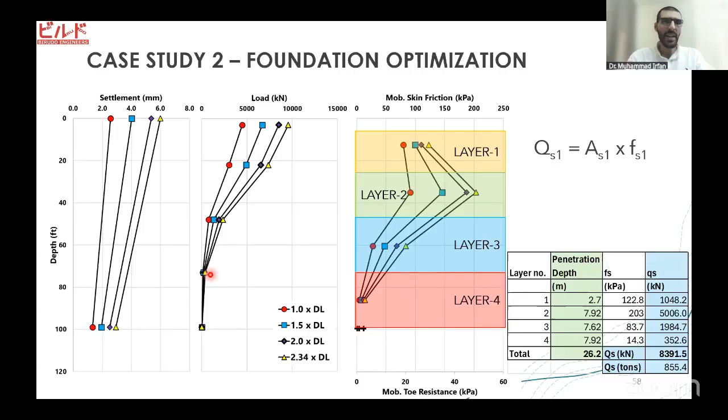But now, because of this instrumentation, you are able to actually see how much skin friction is mobilized there. And if you can see that, you can work out what is the total length of the pile that is required. You can determine that the 100 feet of length we provided is probably not required, and you can provide a smaller length of the pile. In this project, we were ultimately able to reduce the pile length to around 78 feet by using the same approach.

Now, moving to the last part of this lecture, we talk about a new innovation technique.

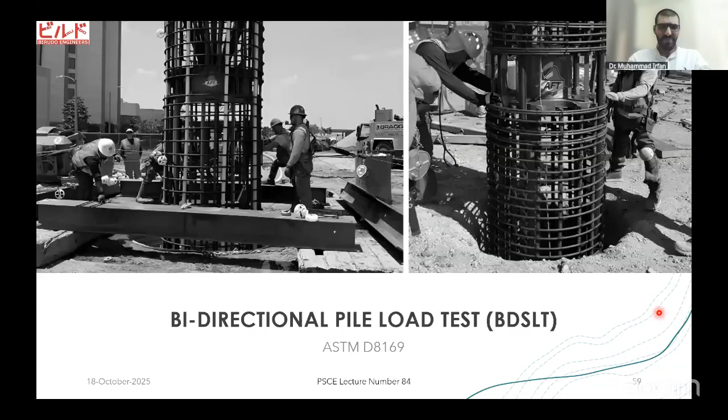That's the bidirectional pile load test, which is pretty common. I'm sure our friend from China who has joined in would probably share something on that as well. Let me give you a brief introduction about what this is about. The bidirectional test is also known as the O-cell. This is an interesting technique which was developed back in the 1980s by Professor Jorge Osterberg. He established a company later on in the 1990s, and that's the same company which was later acquired by Fugro and became the Fugro load test, and they became the worldwide leaders in this technology.

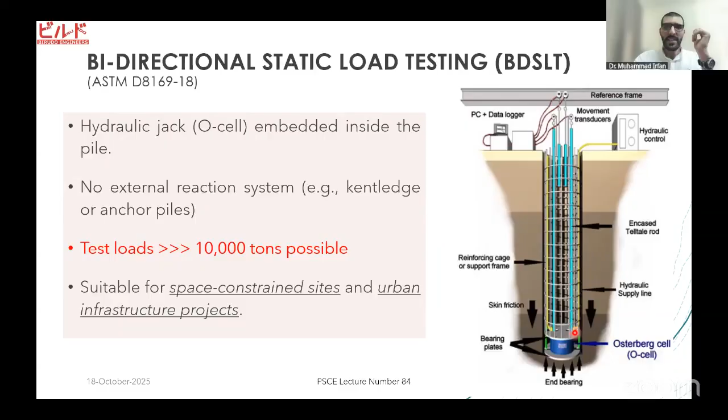What happens is that these jacks inside try to expand, and when they expand, they push the pile upward and downward. By doing this, you are able to see the same kind of pile behavior. I'll explain more of that in the next slides.

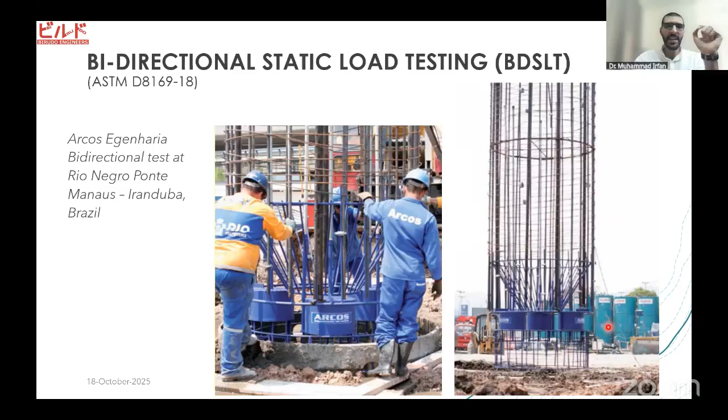So this is just to give you an idea how these jacks look like. They're just installed inside the cage, inserted into the pile. Once you have installed and tested this, this is the cell that is there. You apply pressure from that and expand it.

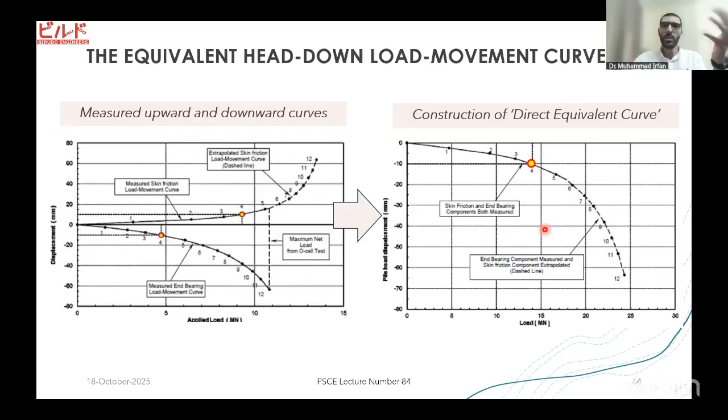There are well-recognized approaches available which you can use to convert this butterfly curve into a conventional load settlement curve that we are more comfortable seeing. You can convert this butterfly curve easily into the top-down load settlement curve as well. I'll just quickly skip that and move on to save time.

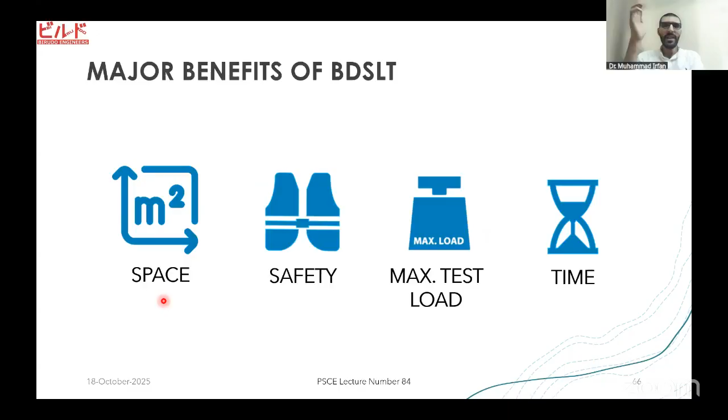I'll show you some of the benefits of bidirectional static load testing. There are four major benefits: you can save space, all the safety concerns we talked about are gone, the maximum test load is not restricted, and you can save time as well.

This is something we're more used to seeing, that with more urbanization, we are having to perform these load tests in dense, congested environments. I personally remember working during the days of the Orange Line Metro train project, and it was a huge hassle finding a place where a test pile could be cast and a huge kentledge erected for the load test. Now compare that with the small space required around the pile using bidirectional pile load testing. Also, if you're testing offshore or in similar places, it's a huge challenge and cost, and this can save you on cost as well.

And talking about the safety and the maximum load, we have seen these kind of failures not only in Pakistan but abroad as well. In making a kentledge or even for the reaction pile, a small failure can lead to a catastrophe. A lot of people have lost their lives in that, and it can actually delay your project as well.

The other big challenge is that the maximum test load is limited and restricted. As I previously mentioned, generally we are comfortable seeing loads of the order of maybe 500 tons, 1,000 tons, 1,500 tons, or a maximum of 2,000 tons in the local industry. But if you want to go to a higher load, that's not possible with these conventional assemblies. When you talk about bidirectional pile load testing, the sky is the limit.

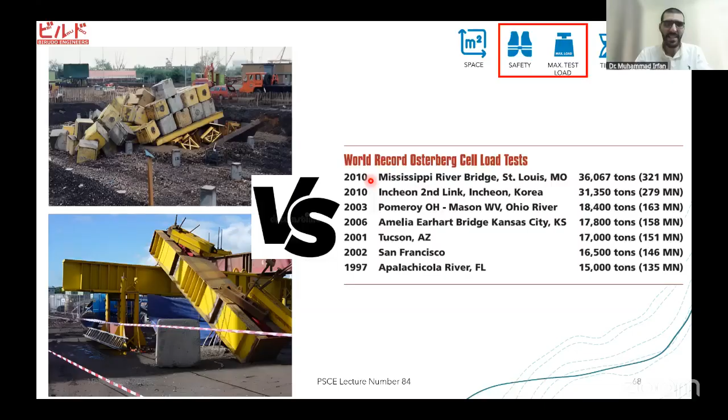So this is just some data that I found. Even in 2010, probably a 36,000 ton load test was conducted, and you can imagine the possibilities that are there. I'm sure probably 15 years have passed from 2010, so much larger tests would already be done than this. So this limit is also eradicated if you do that.

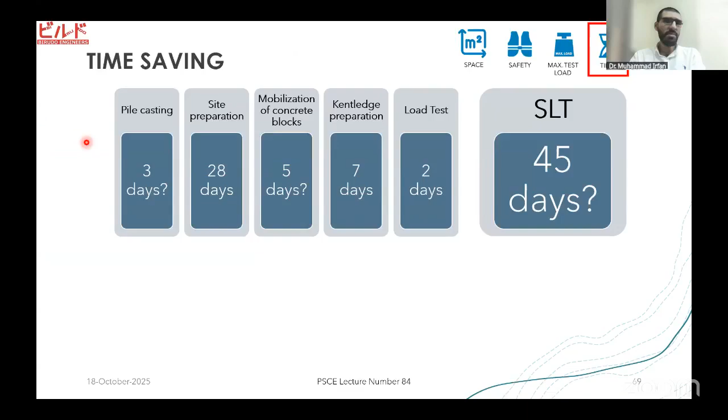We also know that time is a big challenge generally in any project in Pakistan, but more so in government fast track projects. Time is always a challenge. So it's a very quick method. You can do it very quickly, and you can save a lot of time.

It's a very conservative estimate that I have given here, because even in these 45 days, the majority of the time is to wait for the concrete to achieve 28 days strength. But if we can, just for that test pile, use an early strength concrete, we can probably bring this time down to maybe 10-ish days or something. So you can save a lot of time just by using the bidirectional pile load testing as well.

So that's pretty much it. Now just to give you some concluding remarks, I've tried sharing some practical insights from hands-on experiences in the pile testing industry. And I've tried to emphasize that just by performing a static pile load test where you measure the head movement only, that does not give you the full picture or the full idea about the behavior of the pile.

For that reason, you have to invest a little bit more at the testing stage. And if you invest more at the testing stage, that can actually pay you back big time in the entire lifespan of the project, in the construction working pile stage. In this context, the instrumented and the bidirectional pile testing can benefit you a lot.

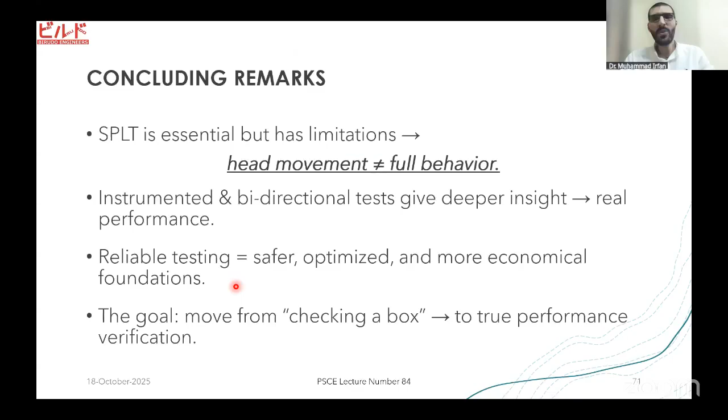Many times I've seen on projects, people are sometimes just concerned with checking a box that the pile test was done, without realizing the significance of this thing, that the whole project's sanctity sometimes lies on just one good test being done. So that's why I think it's important to realize its importance and focus more on that.